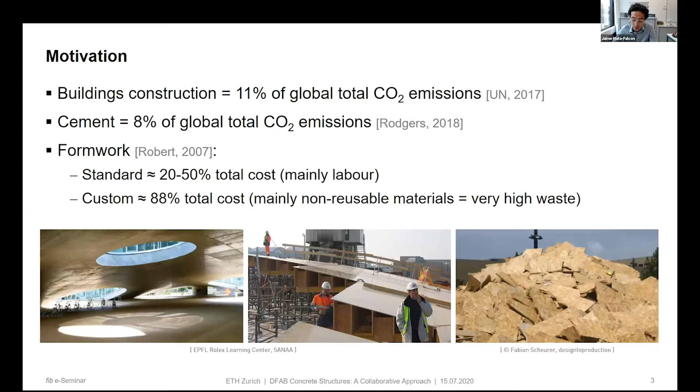So we have a bit of a contradiction. We try to build more efficient structures, but if the formwork is not properly solved, then maybe it's not a good approach to do this optimization. And this is what digital fabrication offers: customization at not much extra cost or material consumption. This is the main goal of digital fabrication, which could enable us to use structurally optimized shapes and achieve our goal of having a leaner construction.

For concrete structures, this means that either we build without formwork, which is what you have seen in the previous presentations with 3D concrete printing, and there are also some spraying approaches to do this. But I would like to point out that in digital fabrication, we can also have processes in which we use a non-conventional formwork. This does not gather a lot of research attention, but there could be high impact from these other technologies.

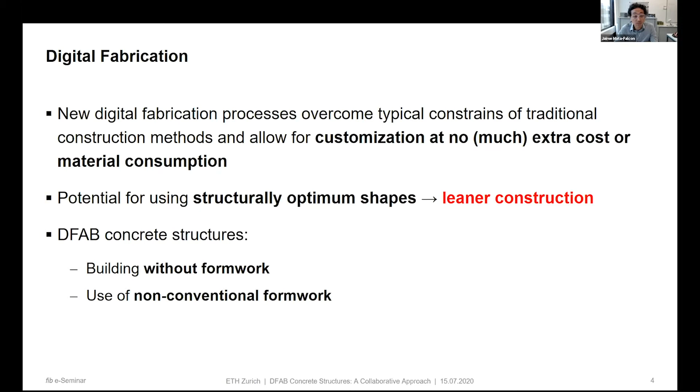But okay, this is very interesting, but we also face a lot of challenges in digital fabrication. It's difficult to be competitive at the moment. And we have to admit that conventional construction is in many cases very efficient. Here you can see in the bottom part some examples of hollow core slabs that contain insulation, in situ grid slabs with openings for installations, or bridge construction. It's already very efficient. So we can improve, but it's not that easy.

Another point that is maybe not helping us at the moment is that most digital fabrication concrete mixes have much more cement and much more clinker in them, so they have more environmental impact than conventional concrete. So to have a benefit, we should really reduce a lot the amount of concrete we use, or improve our concrete mixes. This is something to be done.

Then the integration of reinforcement has already been indicated by other people. At the moment, we have hardly any technology that can integrate reinforcement in the amounts required by standards. There are many applications in which we have just unreinforced concrete.

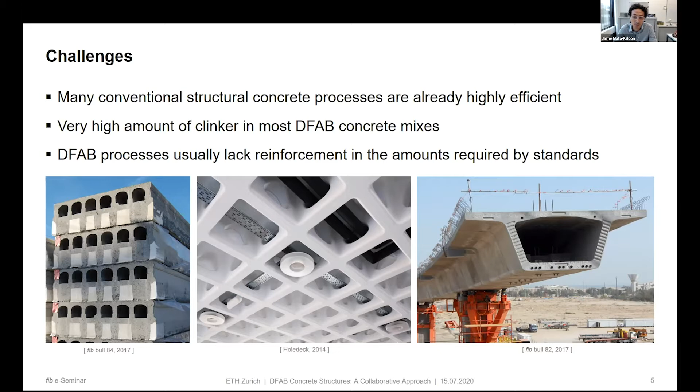So then this cannot be considered a concrete structure. I think we are more competing with masonry structures that maybe are more efficient to build, like simple houses. Then even in the case that we can have this form freedom allowed by the technology, especially in the case of housing, we have other requirements for geometric simplicity. So this might be also a limitation for the optimization in digital fabrication.

Then the design philosophy is very important. In the next presentation, Freek Bos will show a bit of what is the process of design by testing. But in my personal opinion, research should focus on developing technologies to build in a digital manner concrete structures that behave similarly to conventionally built structures. Because if we deviate a lot, and each laboratory or each concrete mix deviates in a different way, I think it's super difficult to reach some standardization, or to be able to design structures in the way we do conventional structures. So we don't need to do prototype testing each time.

And another important thing is not on the fabrication side, but if we are talking about customization, we need to talk also of new digital design tools to be able to handle the customization in an efficient way. And last but not least, if we want to reduce this 8 to 10% of CO2 emissions caused by the concrete industry, I think we should think a bit worldwide. It's a fact that at the moment we are in general in high-tech solutions that might not be applicable in most of the constructions over the world.

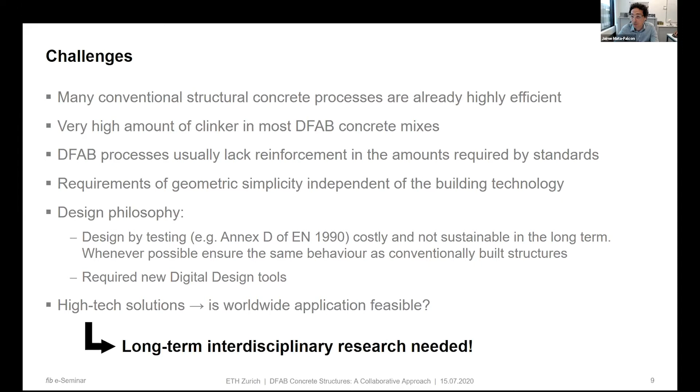So these are challenges, but I think this is an interesting field of research. And I think we can really solve the challenges if we do long-term interdisciplinary research into it. And this is a bit the approach that we are trying to have in Switzerland within the National Center of Competence in Research in Digital Fabrication, where, for example, I'm on the structural engineering side, so I don't know much of material science.

But when we are developing a technology, we have to put together the different constraints of different fields that often are a bit contradictory, and come up with something. This is sometimes difficult, but I think it's maybe our only way, and also to collaborate with the different institutions. So I think it should be a must in order to really push digital fabrication to make it real.

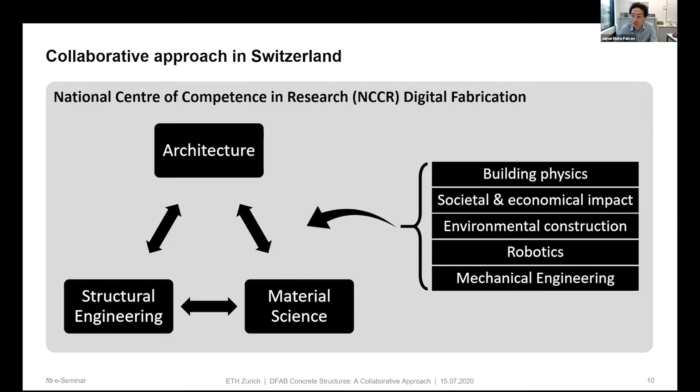Then in the next points, I will show a bit more the research we have been doing, organized by the reinforcement technologies we have used. And I would like to point out first that the role of conventional reinforcement should still be important in digital fabrication, in my opinion. But we should not think in the classical way of doing reinforcement. If we have the digital fabrication of concrete, we should in parallel keep in mind digital reinforcement assemblies or other possibilities.

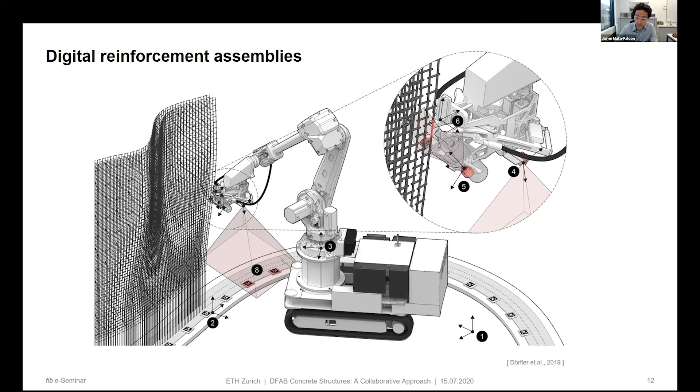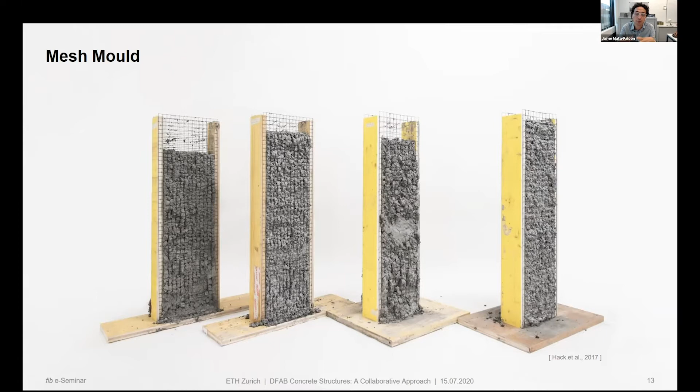Here you will see the In situ Fabricator robot developed at DFAB, which can do this double-curved welded reinforcing mesh. And if we have these possibilities, we can think about, for example, this technology, Mesh Mould. We produce our freeform double-curved mesh that is fine enough that we can cast inside a special concrete mix that compacts well but does not flow out of the mesh. And this leads to a quite interesting technology to build complex shapes.

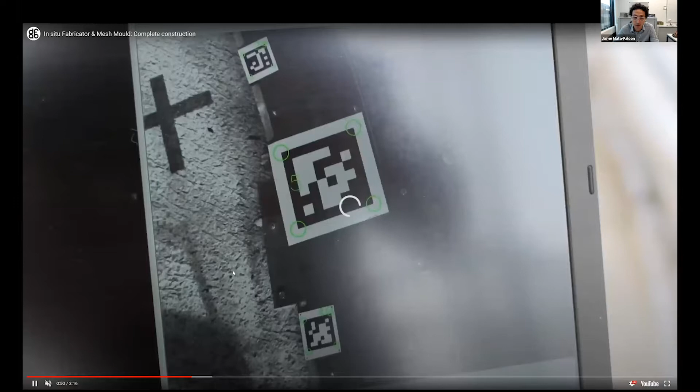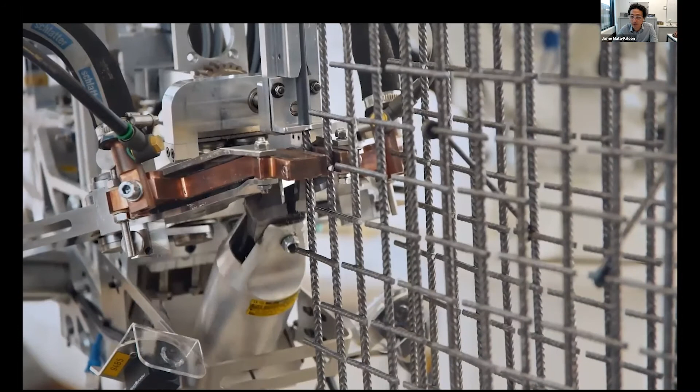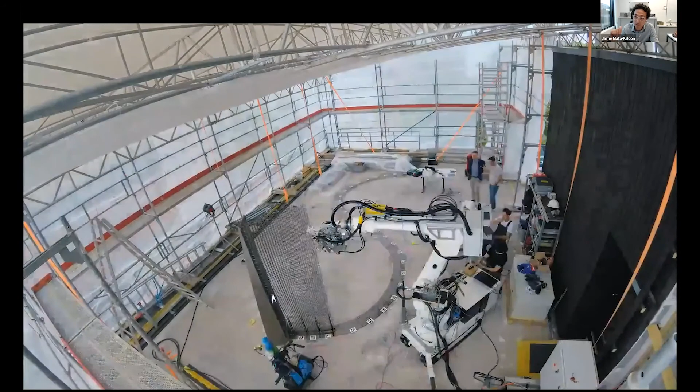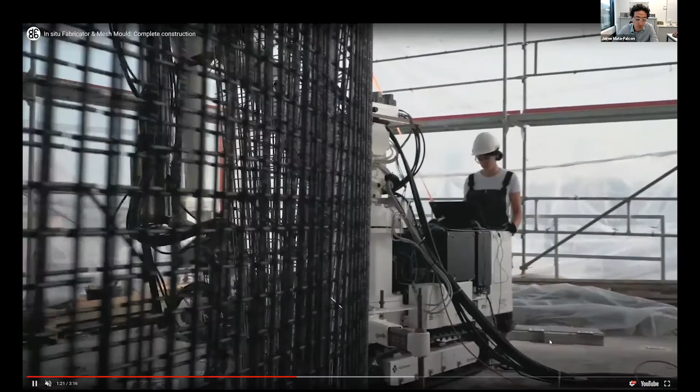Here you can see the production of the Mesh Mould wall at the DFAB House. It is a residence for research guests at Empa near Zurich. And here you see that the robot inserts a continuous 6 millimeter reinforcement, and perpendicular to it is welding short segments. In the future, hopefully, it's not segments, but we can have continuous reinforcement in both directions. This allows us, as you can see here, to fill this wall without the necessity of a conventional formwork.

Then we have other technologies, like smart dynamic casting, which is a robotically driven slip forming process in which the concrete is a set-on-demand process. So it's an accelerated concrete. It enters the formwork in a fluid state, and it leaves the formwork when it starts hardening, so it can be safe and can carry the weight of the concrete on top.

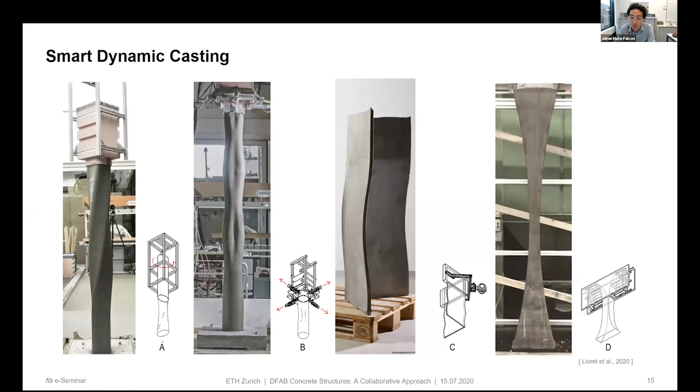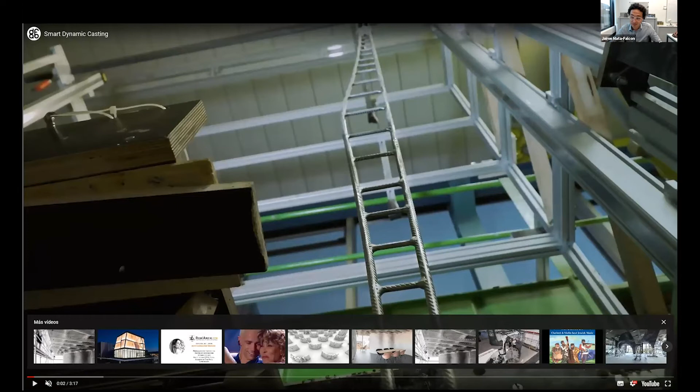And there are several formwork possibilities: rigid formwork that is rotated, on the left, or formwork that can be deformed, like this case. And what about reinforcement? Not in all cases can we introduce conventional reinforcement, but if we still have a simple enough shape in which we can have the reinforcement and slip the element around the reinforcement, we can have, let's say, a conventional structure built in a digital manner.

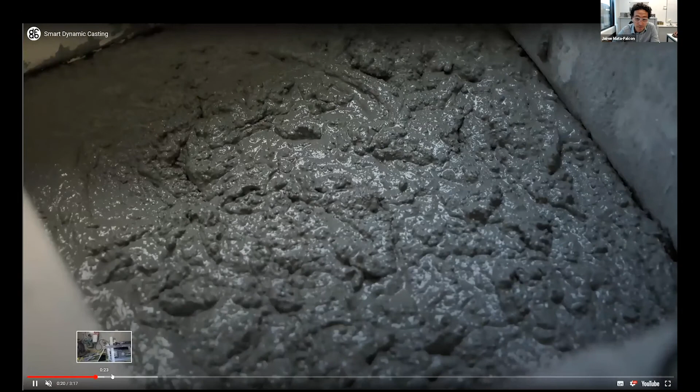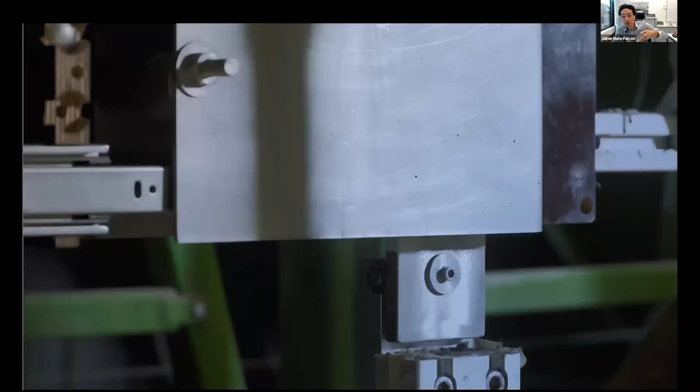Here you can see that the casting in this technology is not like in 3D printing, from the top, but we have flexibility to do it from the side. So this is compatible with having the reinforcement pre-installed. This is the slipping process with a high surface quality.

This is the result of this DFAB house close to Zurich that I was mentioning. On the left are these smart dynamic casting facade mullions, and on the right you see this double curved Mesh Mould wall. In this case, we did prototype testing. Of course, we need to have a structural test to check that everything behaves as expected, or that we can explain it.

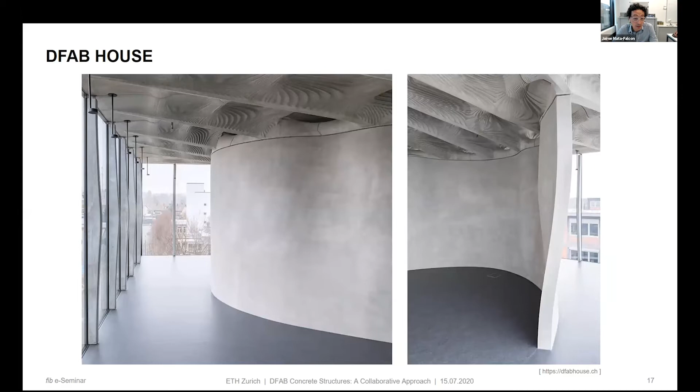Then Eggshell technology, or other technologies derived from Mesh Mould, in the sense that we have a set-on-demand process that can be used for this slipping minimum formwork, but also to reduce the formwork pressure. And this allows us to have minimum formworks. Here it's 3D printed plastic formwork, but it could be just a tensioned plastic foil.

And here is another structure in which, because of the geometry, we could fit the reinforcement inside the 3D printed formwork, and then cast it with this set-on-demand process that minimizes the formwork pressure.

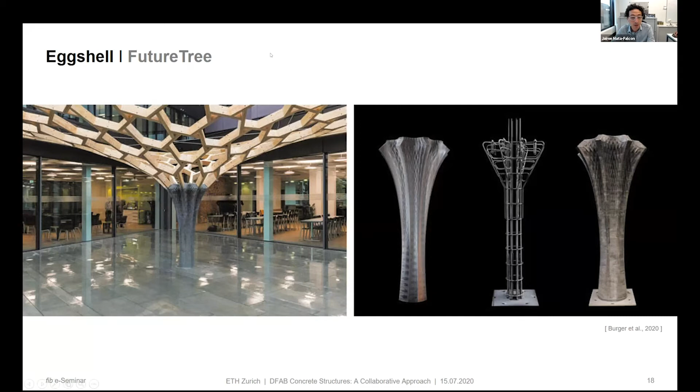But if we look just from the mechanical point of view, having these weak interfaces in our concrete plus continuous reinforcement, because we need this, otherwise we will not have a concrete structure, these weak interfaces are helping us, because they can generate a higher number of cracks. And you can see on the right, we have done some experiments that corroborate what we expect with simple mechanical models. When we have 3D printing with reduced tensile strength in the interfaces, we have 30–40% smaller crack spacing and smaller crack width.

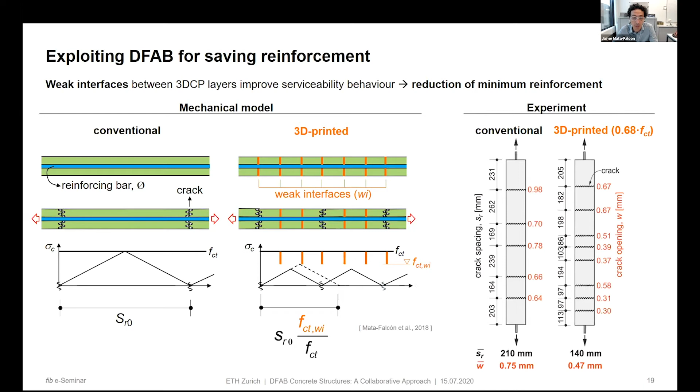Then we have conventional reinforcement, but of course for more complex shapes, fiber reinforced concrete also has a high potential. And we have implemented fiber reinforced concrete in several technologies in the concept that we call interlayer fiber reinforcement. What is this? Instead of placing the fibers in the concrete mix, if we are doing an additive manufacturing concrete process, why not do a separate additive or placing process for the fibers? So we 3D print a layer, and then we place the fibers separately.

And this has some benefits: we don't affect rheology, we can use long fibers because we are not pumping the fibers, and we can grade the fibers and place them only where they are needed and in the orientation we want.

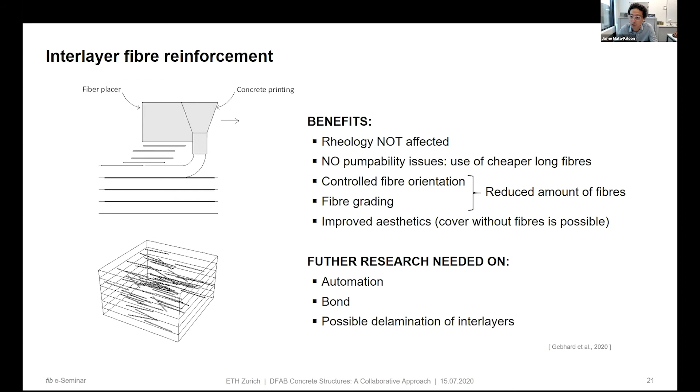We are still working on this approach because it's not automated at the moment, and we have to figure out whether, if we put a lot of fibers in an interlayer, we have some negative effect that we don't have if the fibers are mixed in the concrete.

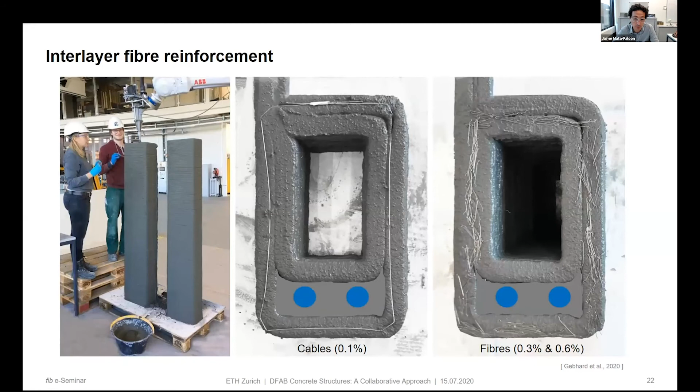Here you can see the results. Of course, when we add the fibers or the cable, we managed to have a good post-cracking behavior. And you see here in the crack pattern we have multiple shear cracks. We were even able to break the cable, so we reached good bond of the cable.

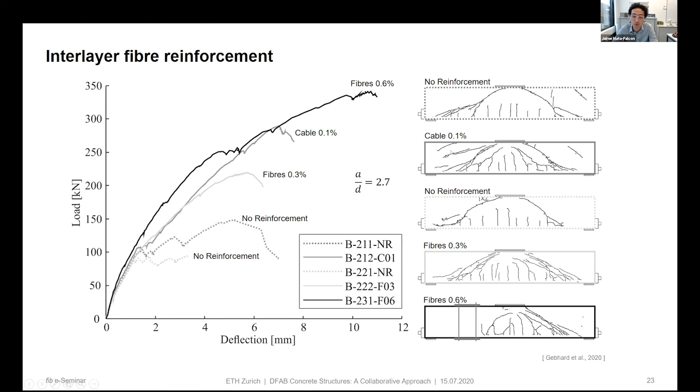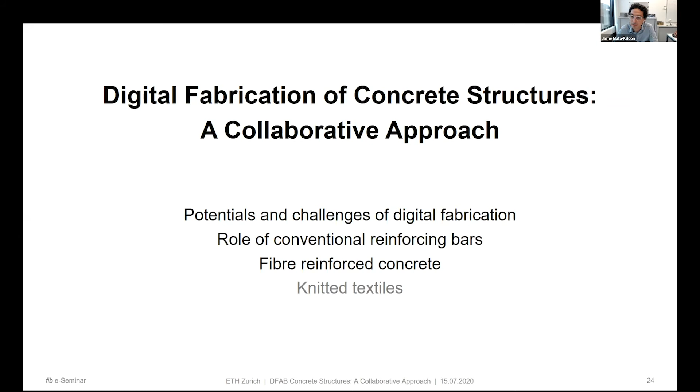So this is promising, but I would like to conclude with a last approach that I think is very interesting: how knitted textiles, that are used for producing t-shirts, and there are a lot of machines that can produce knitted textiles, can be used for construction. This has the benefit, compared to the conventional woven fabrics presented by other speakers today, that complex shapes can be done very easily. While in woven fabrics, to do free-form shapes we have to stitch multiple patches, so it's still quite labor-intensive.

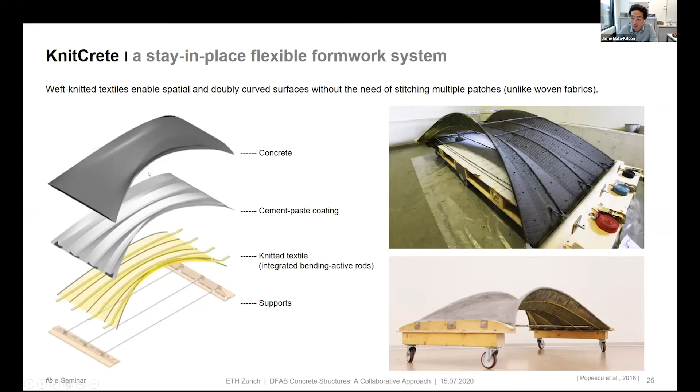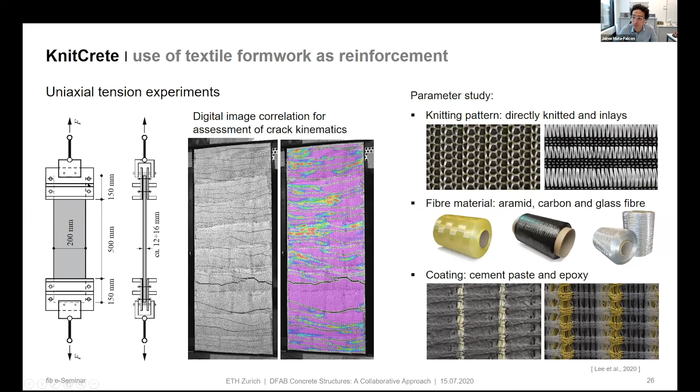And this is the KnitCrete technology, where we have this knitted textile that is tensioned, then a cement paste coating is applied to have enough stiffness to cast concrete on top. And now we are working so that this knitted textile is not only lost formwork, but also works as reinforcement using high strength fibers: aramid, carbon and glass fibers. We are testing this with direct tension, you see here on the left, and also with bending tests.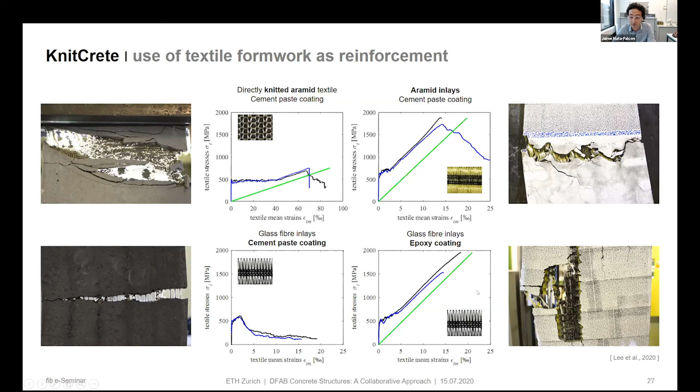Here you can very quickly see the results. When we have just the aramid knitted textile, we have some hardening, but the behavior is not good. But we can also add straight inlays in this knitted textile, which gives a behavior similar to traditional textile reinforced concrete. And we are also checking what if we do a coating with cement paste or with more traditional epoxy. The traditional epoxy seems to work better for glass fibers.

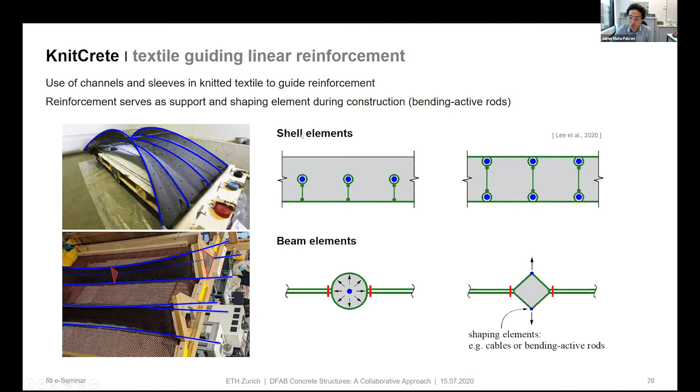And finally, we don't only want to build elements with this textile reinforcement that in the end has a brittle failure; our ambition is to integrate features that allow us to integrate channels for the reinforcement into the structures. In this way, maybe we can use conventional reinforcing bars that do not have to be pre-bent, insert them inside the textile, and these can be bending-active elements that act as tensioning elements of the textile, but also as final reinforcement. And this also has quite some potential for shell elements and beam elements.